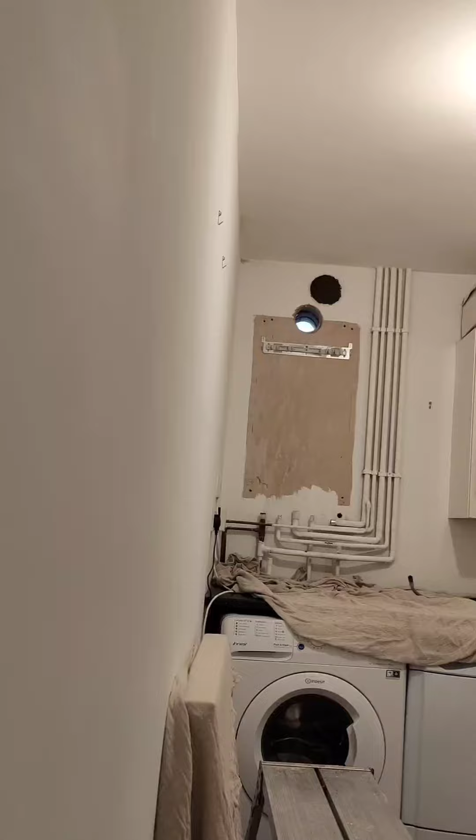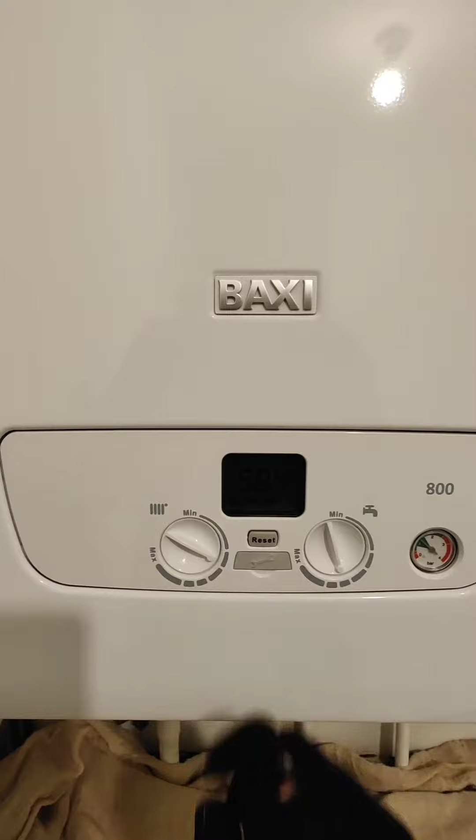This is your Baxi 800, which has been connected to a weather sensor, and I'm going to give a brief description on how to use the boiler and how the weather compensation works. Now this knob here, you'll see the picture of a radiator. This is how to control the radiator temperature. So the higher we turn this knob, the warmer the radiators will be in relation to the temperature outside.

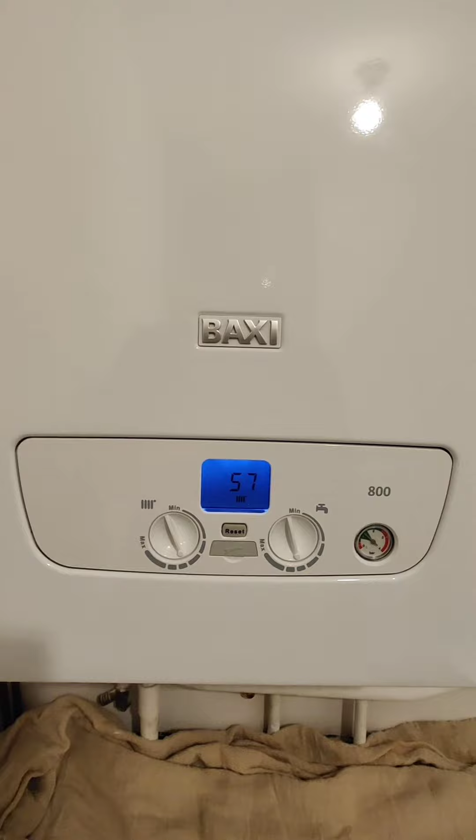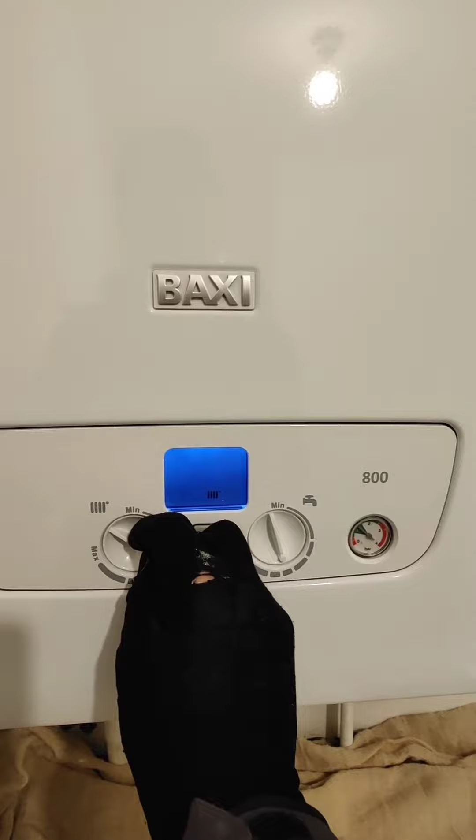Now, how the weather comp works is the colder it is outside, then the hotter the radiators will be. You'll begin to understand it as I go through this. So I'm going to set this to 40, which is standard, but ideally we want to turn this knob as low as we can. There'll come a point where you turn it so low that the house will not heat up. The house will lose more heat than the radiators will provide. So we need to find the lowest point we can turn it while the house is still getting warm.

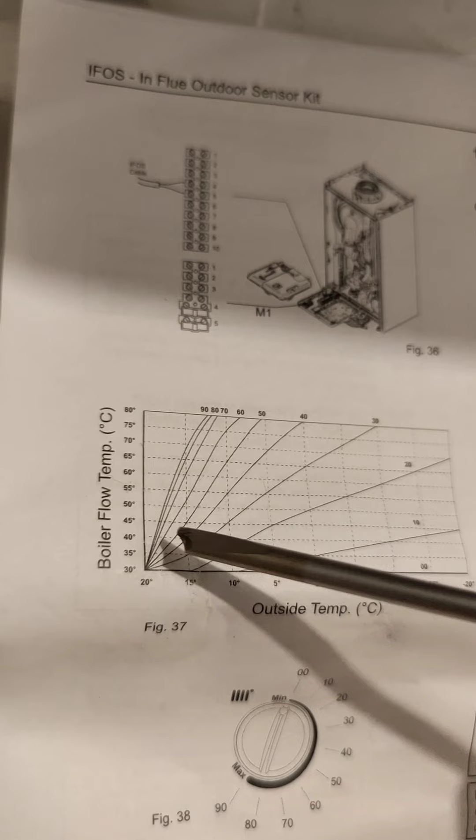The way the weather comp works, it follows this graph, which are called the weather curves. So the numbers we're turning the dial to on the front of the boiler are these numbers around here, and each number relates to a curve. So we've set ours to 40, so we're looking at this curve. Now what we've got here is the outside temperature and the temperature of the radiators.

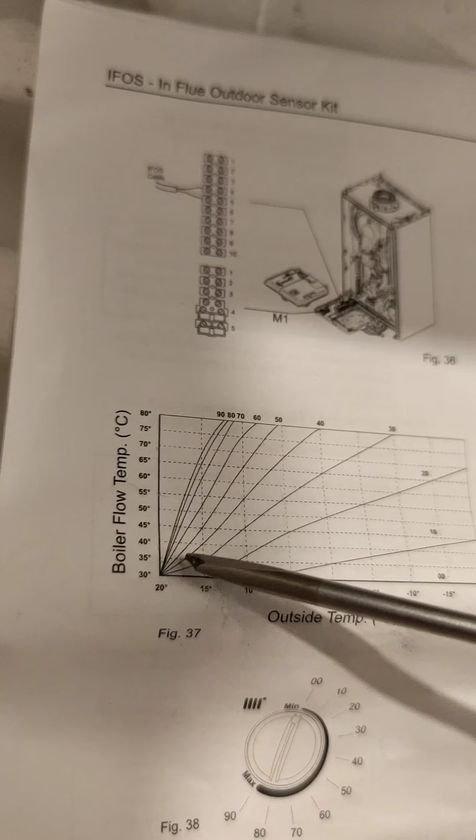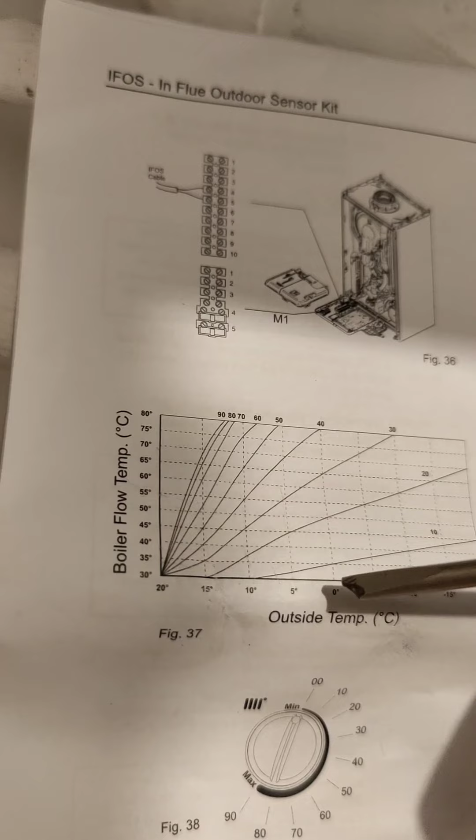So if we follow curve 40, when it is 15 degrees outside, our radiators will be at 40 degrees. And when the temperature drops to 10 degrees outside, our radiators will be up at 55 degrees. And on a day like today, when it's 5 degrees outside, our radiators will go a bit hotter, up to 70 degrees. And anything below zero, the radiators will be at 80 degrees.

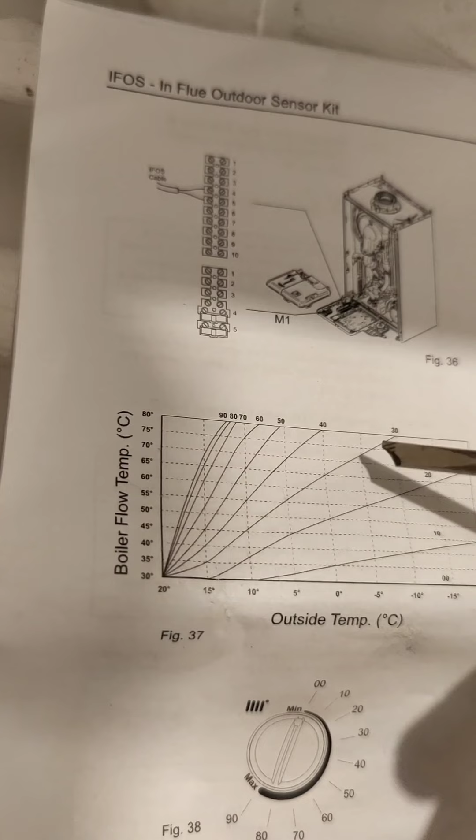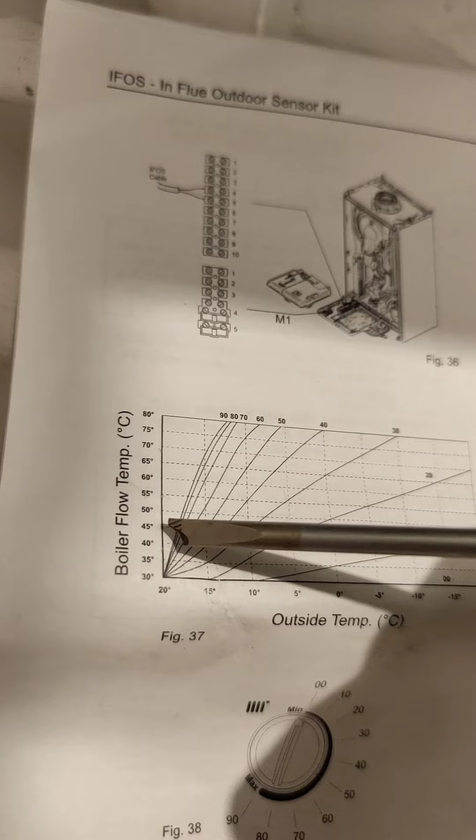So if we were to turn the knob on the front of the boiler down to 30, we'd be following this curve instead, which would mean that the radiators would be cooler in relation to outside. So for example, whereas on curve 40, when the weather's 10 degrees, we'd have 55 degree radiators, on curve 30 at 10 degrees outside, we'd be looking at around 47 degrees or so. So the lower we set the number on the boiler, the lower the curve gets, and the cooler the radiators will be in relation.

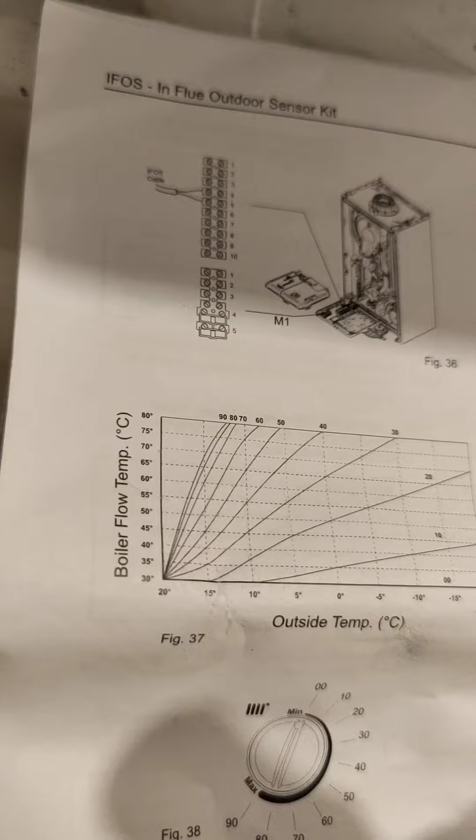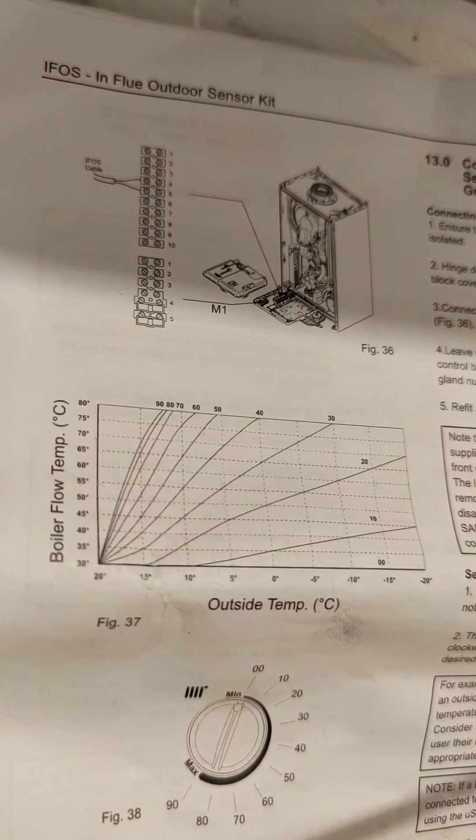So we really want to have the lowest curve we can, but still have the house warm up, because the lower the flow and return temperatures to and from the radiators and the boiler, the more efficient the boiler will be burning gas, so the more units of heat you will get per unit of gas, and the cooler the flue gases will be, which means you're throwing less heat straight out the flue and more heat's being recovered from the burnt gas, and the boiler's condensing more, basically.

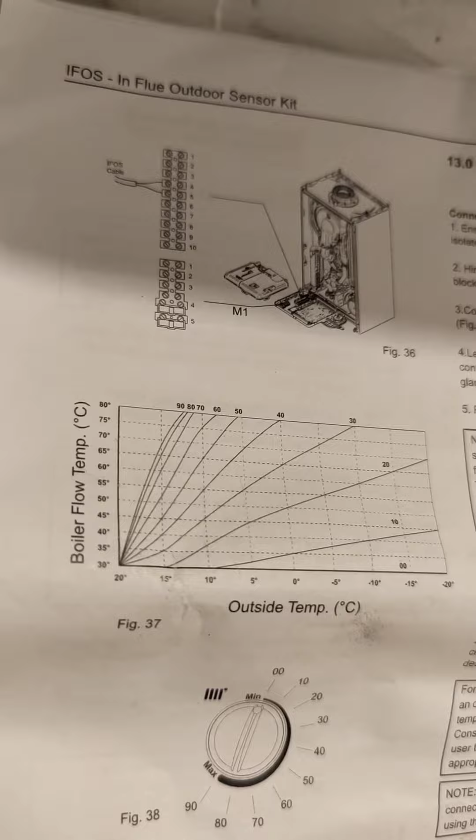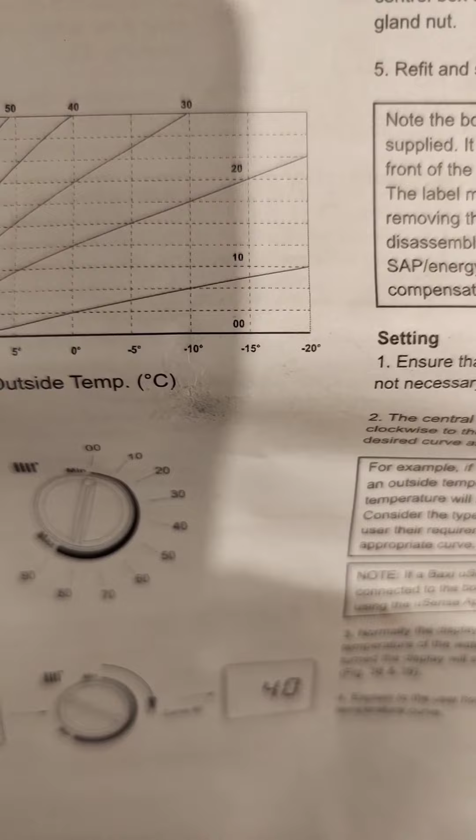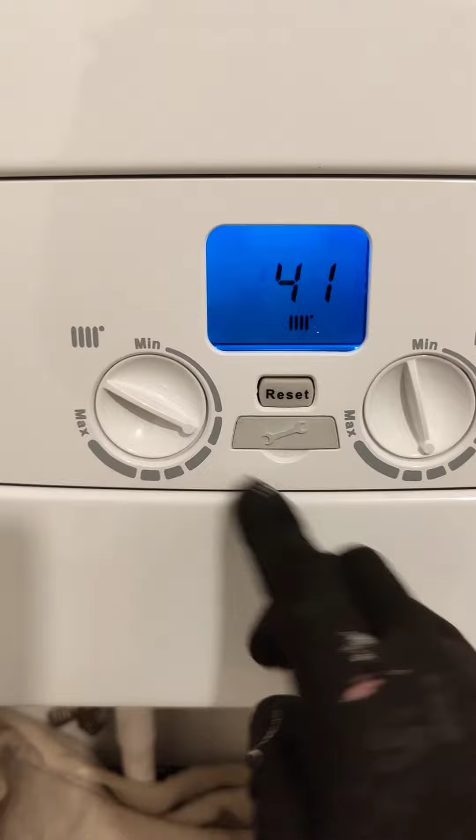So once again, we can change this knob from 0 all the way up to 90, so we can go from curve 0 all the way up to curve 90. So the lower we set this, the better. So I'm going to set it down to 40. But if you find that the house is not heating up, you can turn it up a bit, but I want you to turn it down as low as you can, and then leave it for a day or two, see how comfortable the house is, and then you can adjust it.

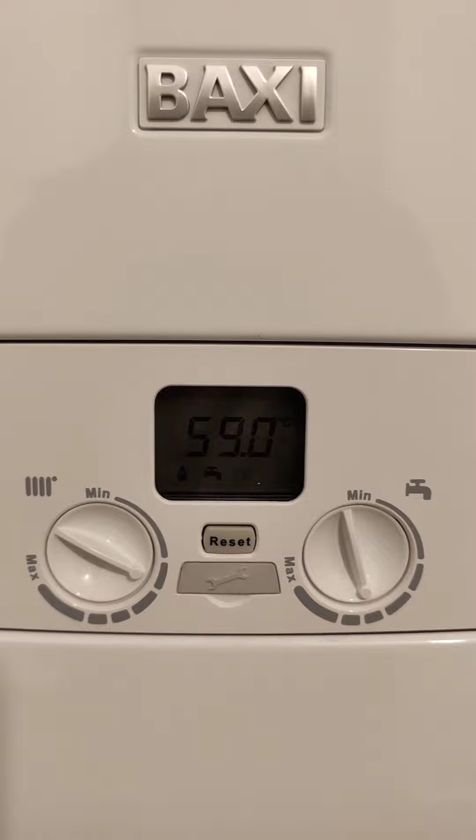You might find that because the radiators are cooler, you might need to turn the heating on earlier in the morning. So if you normally have the heating coming on at 6 o'clock because you want the house warm at 6:30, you might need to set the timer to come on at maybe 5:45, because the radiators are cooler, it will take longer for them to heat the house.

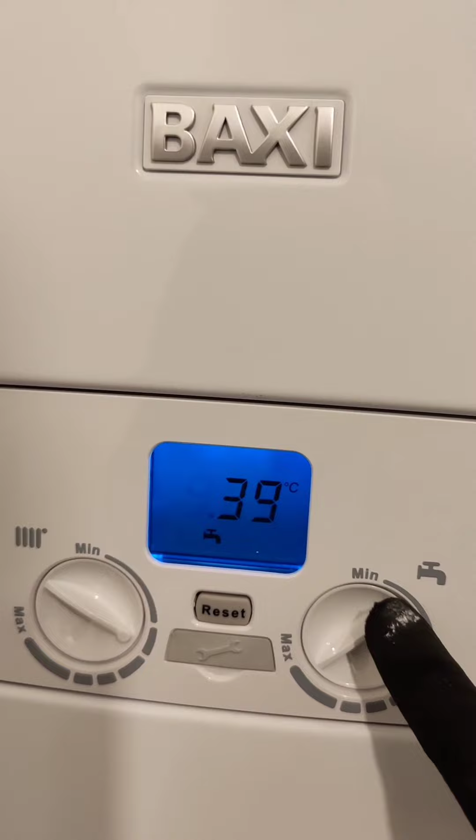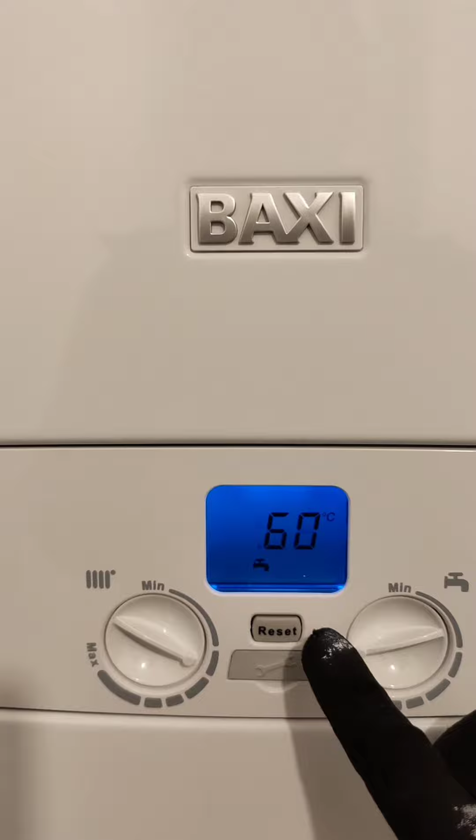This other knob is the hot water knob. It's simple. This is basically the temperature of the water coming out of your hot taps. So if you've got the kids here and you don't want to burn their hands, you can turn it down to a nice temperature, maybe 45 degrees or so, and if you want some really hot water to do the dishes, you can turn it up as high as you want. It doesn't really matter where you leave this, so you can turn this one up and down however many times you want.

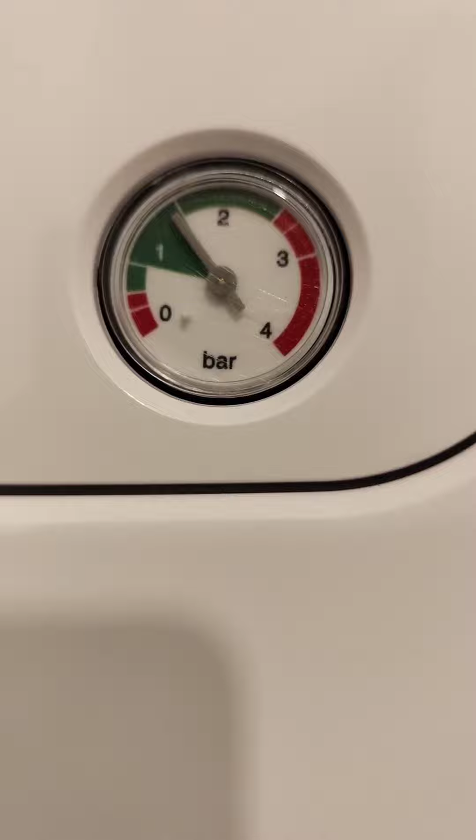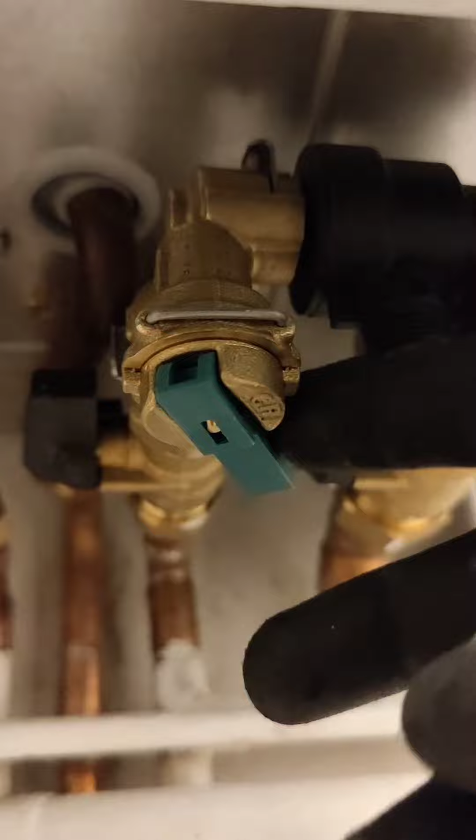Now, we've also got a pressure gauge on the front of the boiler. This should be reading between 1 and 2, ideally 1.5. If the pressure does drop below 1, you've got instructions on the side of the boiler of what to do. But we've got the filling loop under the boiler, which is this green lever on the right hand side of the boiler. If we pull the lever down, it'll allow pressure into the boiler. So that's how you top up your boiler.

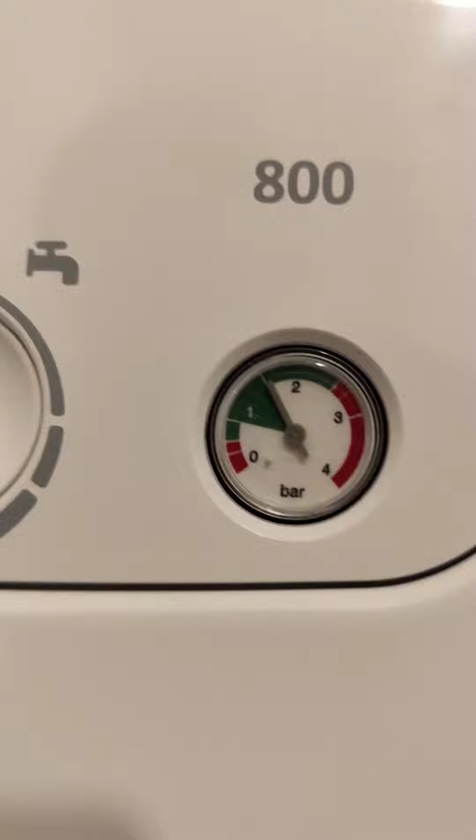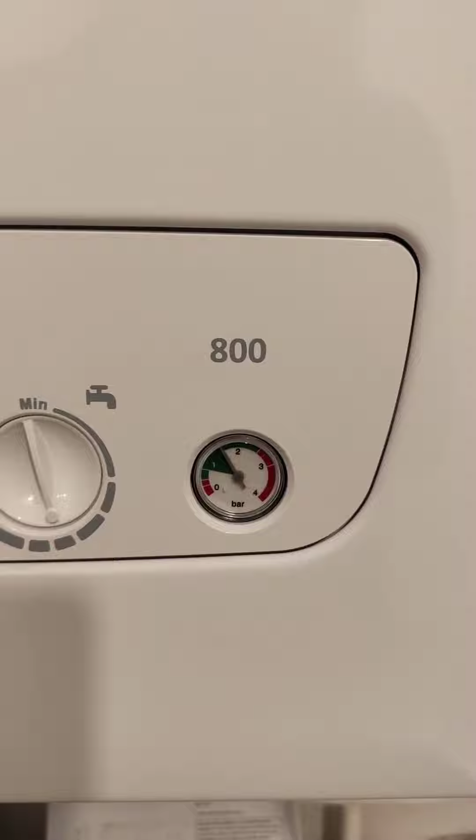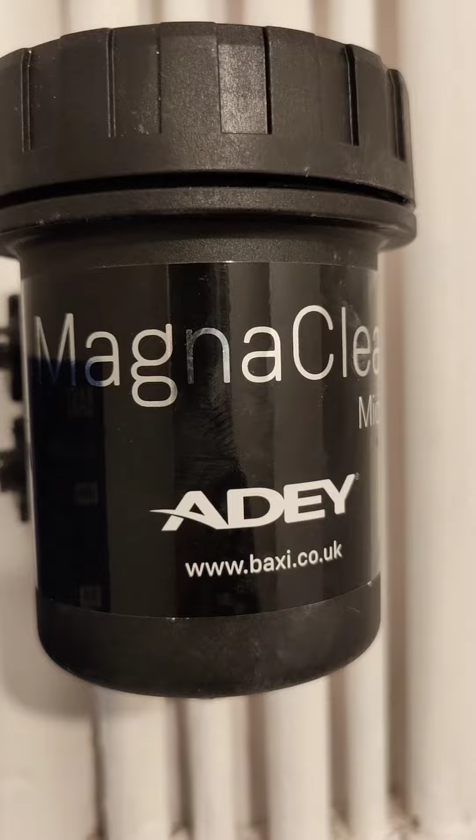Every time the boiler is topped up, you're adding fresh water into the boiler, which may cause corrosion in the system, so we need you to let your installer know every time you're topping up the boiler, just in case there's a problem somewhere. We've also got this magnetic filter here, which is on the return of the heating. This has to be cleaned out every year on the annual service. And the boiler's got a 10-year warranty, so this boiler does need to be serviced every year in order to keep it.

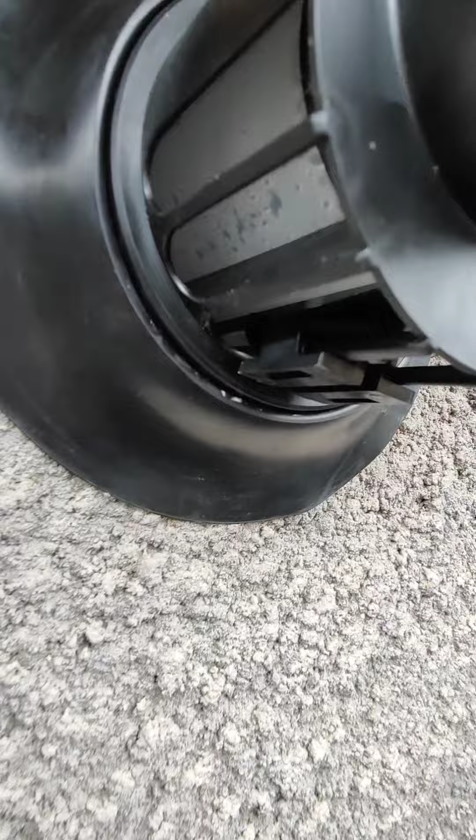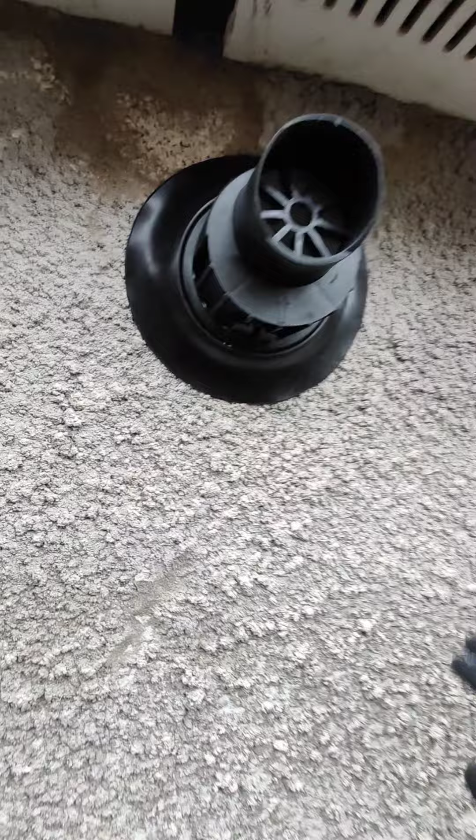The sensor should be sited on an outside wall 2 meters above ground level, and it should be facing north or northeast. It should not be facing west or south, because the sun will affect the readings. Now, here we've got the weather sensor clipped inside the flue, which is great because we've got a southwest facing wall here, so this is the way to get around it. And this is plugged in to the boiler through the air intake of the flue.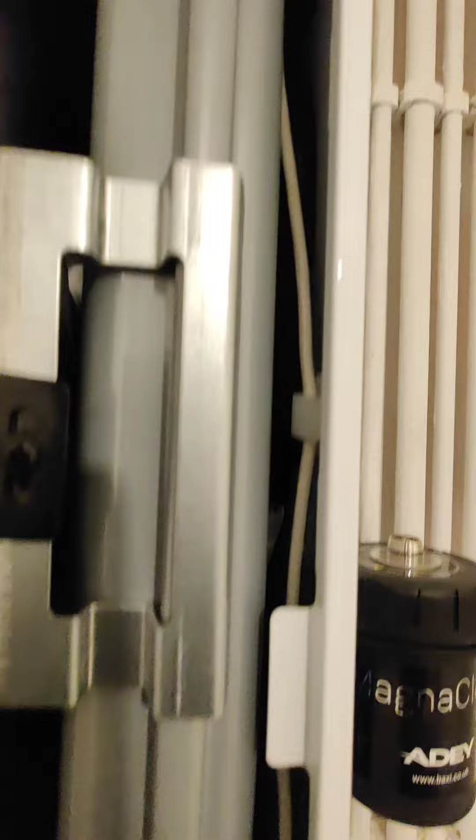If we remove the case from the boiler, we can see it's coming through the air intake, and it's been run around the boiler, and it's plugged into the printed circuit board right here. If we didn't get on with the weather comp, we could always unwire it from the PCB.

This is the room thermostat. It's showing you what the temperature of the room is, the temperature we're aiming for, and whether the thermostat is calling for heat or not. If the top number is higher than the bottom number, then we'll be calling for heat, and if we drop the number below the room temperature, then the boiler will stop calling for heat and the flame symbol will go out.

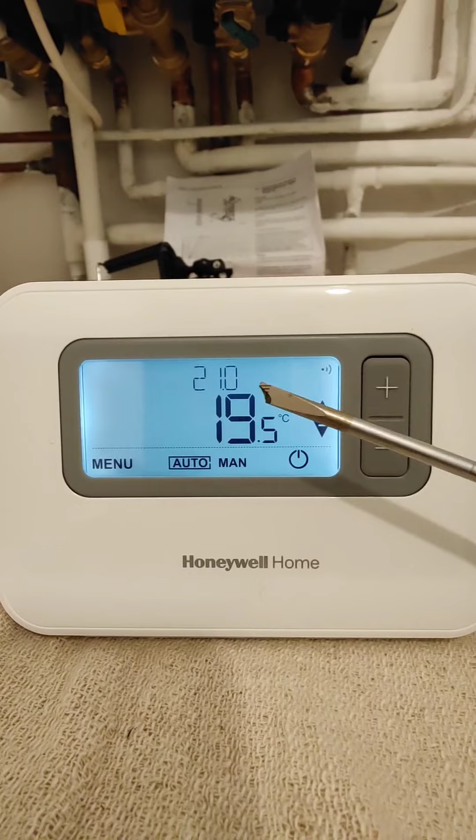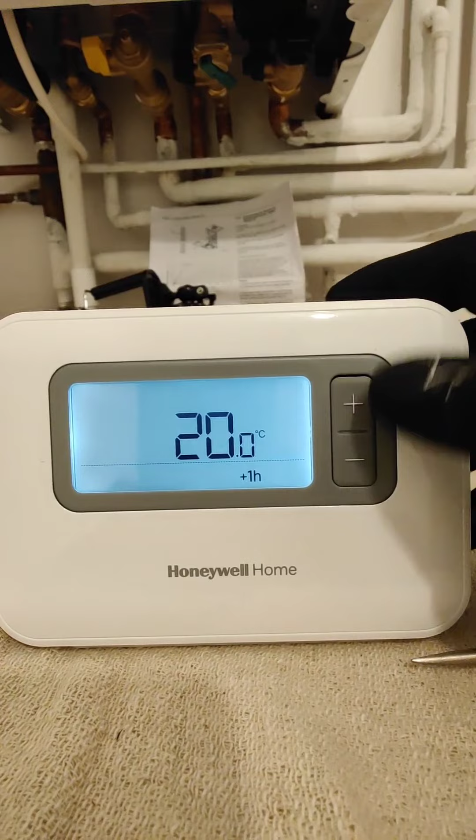Now, the comfortable temperature for most people is 21 degrees, but if we want to be energy efficient, it's been said that for every 1 degree we drop it, you're saving around about 6% on the gas. It's obviously different in every house for every system, but the lower we can set this, the more efficient and less gas you're going to be using.

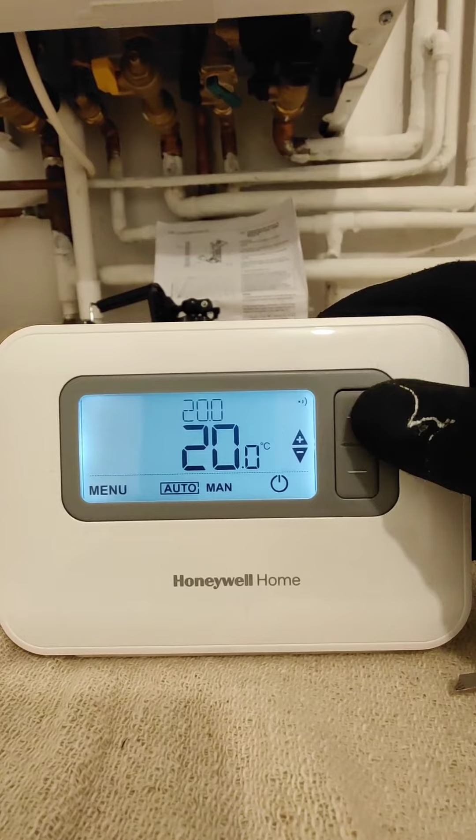And what you will find is the lower the flow temperature to the radiators, it'll give you a much more comfortable heat in the house. The room temperatures are not going to fluctuate so much, they're not going to go up and down. The lower the temperature of the radiators is, then the lower you can kind of set this. So you might find that 20 degrees, or even 19 degrees, will be just as comfortable as 21 once we've got the low flow temperatures going on the radiators from the weather curve. So we'll set this to 20.

Again, if you don't get on with this, you're not warm enough, we can always turn this up, but we want to set this as low as possible.

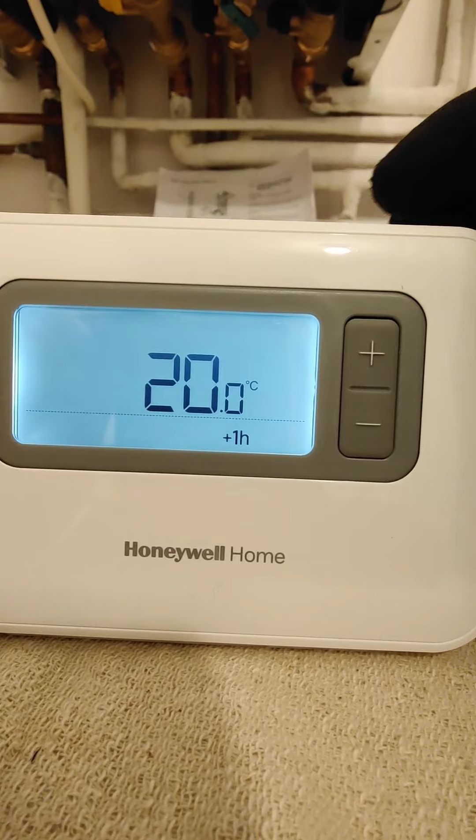Now, just another point, the radiator in the same room as the thermostat needs to have the thermostat set all the way up to 5, or ideally there should be no thermostat on the radiator, because what can happen is the radiator might get up to temperature, the thermostatic radiator valve will turn off, but the clock will continue to call for heat from the boiler because the thermostat itself is not getting up to temperature, so they're actually conflicting with one another.

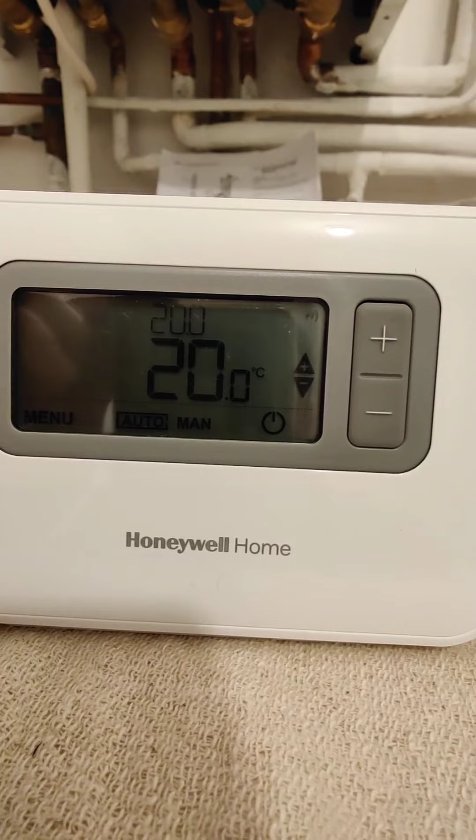The room stat should be sited away from any radiators, any corners, any cold spots, and it should be in the heart of the house, usually the hallway.

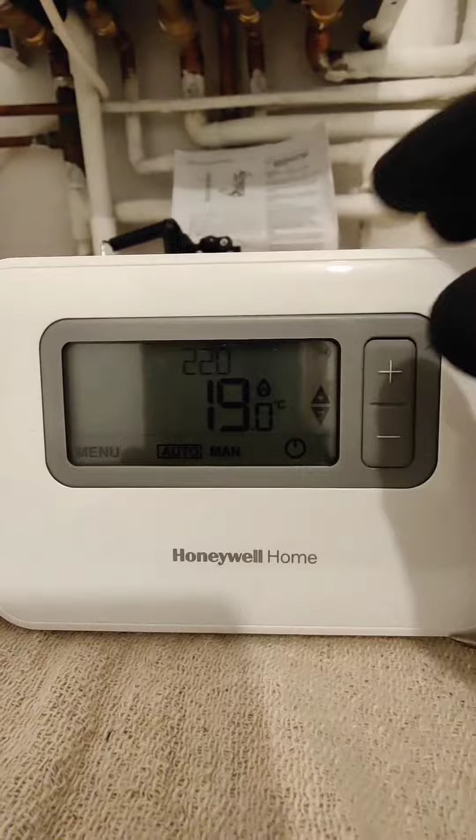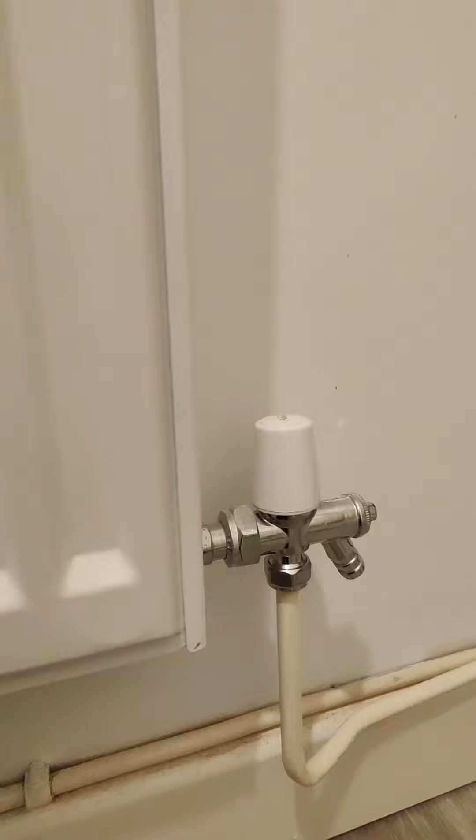Now, a quick word on the thermostatic radiator valves. We've balanced the system using the valve on the right, which is the lock shield valve. So on every radiator you'll have a thermostat and a lock shield. You do not touch or turn the lock shield because you'll send the system out of balance. We're trying to get each radiator heating up at the same rate, so the return water to the boiler is the correct temperature, which will also make things more efficient and make everything heat up at the same time.

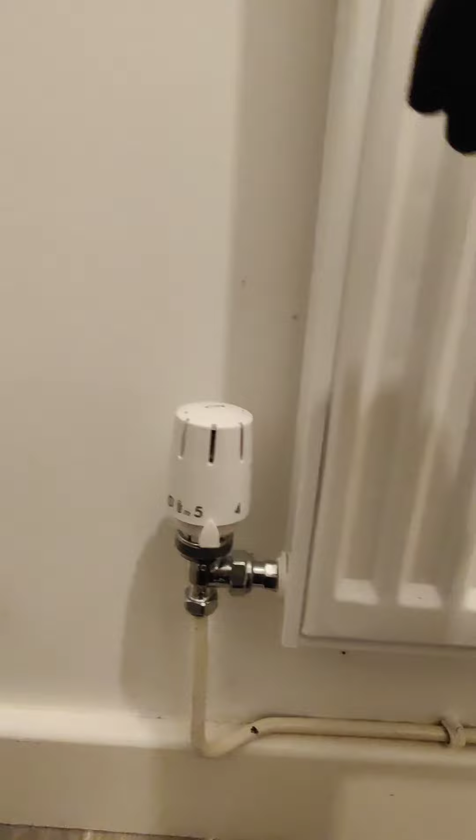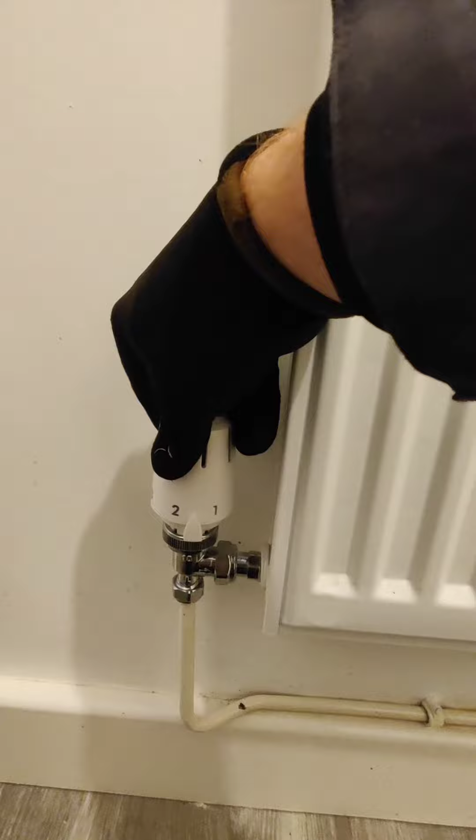Now you can turn the thermostat up and down as much as you want. This doesn't control the temperature of the radiator, it actually controls the temperature of the room. So each number represents a room temperature, and we turn this to how warm we want the room. Number 3 is just a mild warm temperature; in the cooler rooms like the bedrooms you might want to set it on number 3, it might be around about 18 degrees. So the radiator will be hot until the room reaches 18 degrees and then the radiator will shut off.

Number 4 will be warmer again, it might be 21 degrees, so you might want to set your living rooms to number 4. So the radiator will be hot until it reaches 21 degrees, then the radiator will shut off. And then when the room drops below 21 degrees, the radiator will come back on.

And number 5 is basically the radiator's on all the time. So this number we generally only use if the radiator is in a wet area like the bathroom, or if it's in the same area as the main room thermostat. So the room with a room thermostat, which is usually the hallway, should either not have a thermostat on the radiator, or if it does, it should always be left on number 5.

Now the radiator will not heat up any quicker on number 5 than it will on number 1. The radiator will heat up just as quick, it'll just shut off earlier the lower the number. So we try and find what temperature you want each room, and then you can turn the thermostat to what number you want and just leave them, and the rooms will all be at the correct temperature and also be saving you money.

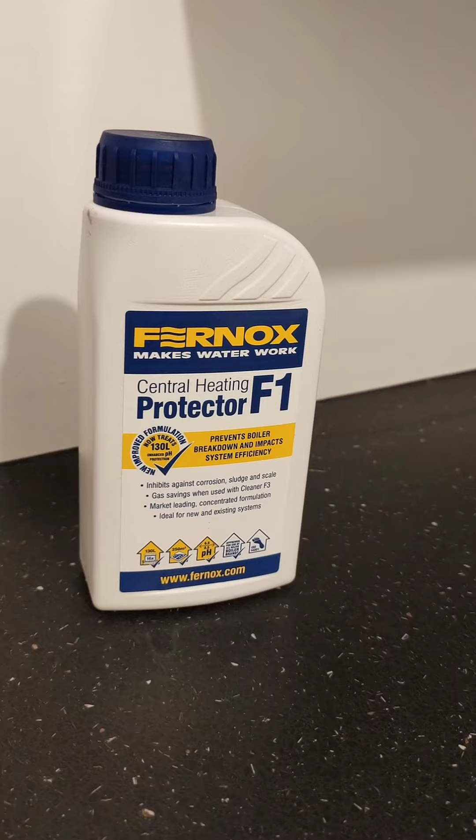The system has been flushed and it's been filled with Fernox F1. If the heating system ever needs to be drained, the inhibitor needs to be redosed, which means adding in another bottle of Fernox ideally.